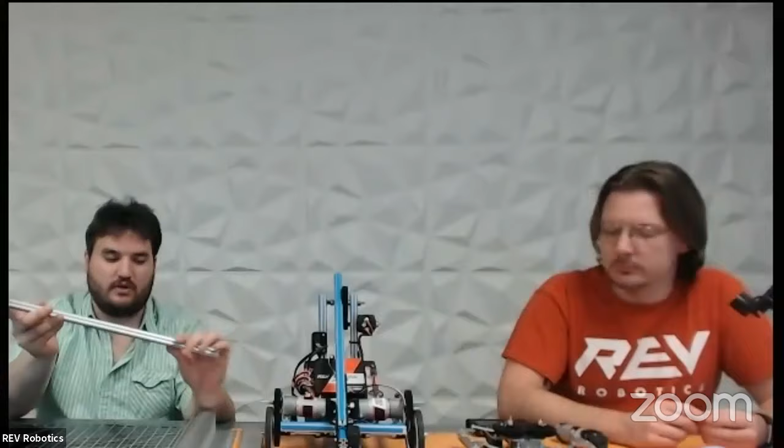Being able to prototype something in a computer lets you make all of the mistakes for free, right? Not only do you have the ability to see how long a piece of material should be without having to cut it, but you also have a superpower, and that's the Control Z button, right? You can undo any mistake and you can redo something different. You can try all of these things in a virtual environment really quite easily.

And it lets you figure out the problems before you spend a bunch of time, because modeling up something in CAD, I know at the beginning it seems like it's easier to do it physically. But as you get better, as you practice with CAD, you will find that you can mock something up much faster in a CAD program than you can in real life. So you can try all of these ideas much more quickly.

And one of the other things is, if you don't have access to a 3D design software, it doesn't necessarily mean that you shouldn't be thinking about your design ahead of time. One of the big things that Frank is mentioning is scale. Scale is really, really important for you to get a handle on. In the computer, it makes some of these things faster and easier.

But if you're using grid paper and you have a scale where each piece of the grid is equal to 1 millimeter or 5 millimeters or a centimeter or some unit of measure, you're able to then take that and apply it to the real world. So you can sit down and say, you have a ball, which is going to be 40 millimeters in diameter, and you can draw out with a compass what that is. And you can see what the minimums are going to need to be before you even get started.

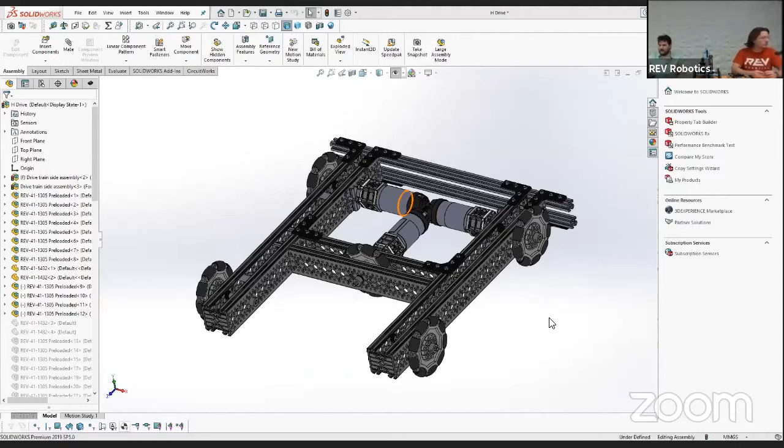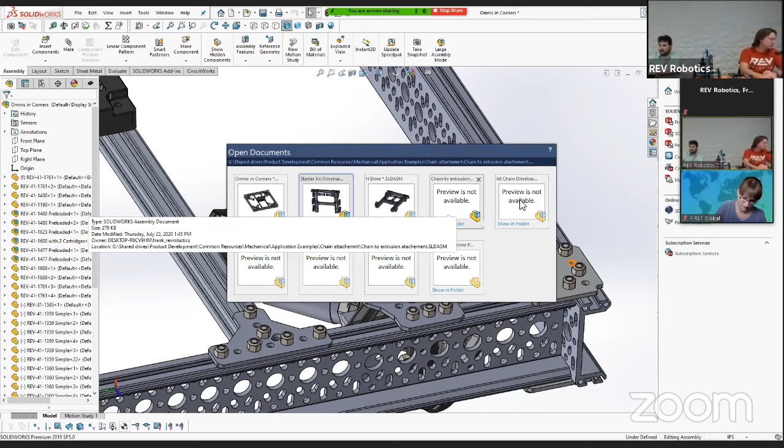I actually wanted to share some examples of things that we've got mocked up in CAD. Here's a drivetrain example. Here's another drivetrain example. These are all different things that you can relatively quickly do in a CAD program and figure out exactly which brackets you need, figure out where all the nuts and the screws need to go to make all of these things possible. It is a tool to help you come to your design faster.

And when you get there, it's going to be more thought out, it's going to be stronger, it's going to be more reliable. So again, to answer that question, yes, it makes a huge difference. It makes all the difference in the world.

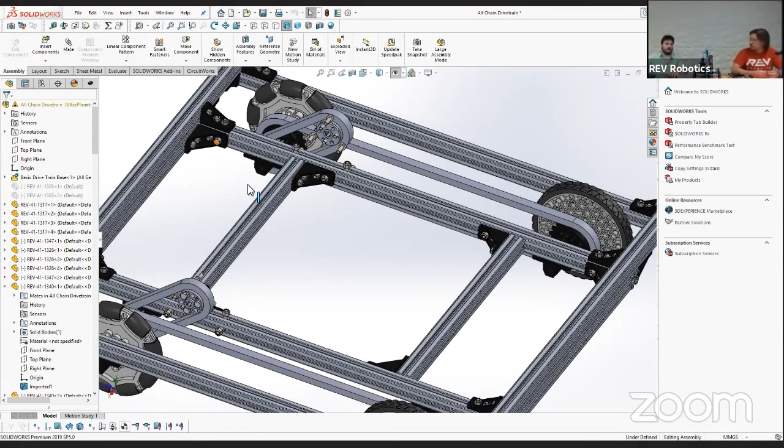And I believe we're going to be doing another live stream in the coming weeks, specifically on CAD design using SolidWorks XDesign. Yep. We'll go over some topics like Crayola CAD and doing assemblies using XDesign. So that'll be really cool. Yeah, and that will give a little bit of an intro, some training from us here to walk through that tool. Every First Global team has access to XDesign. So thanks to SolidWorks for giving these licenses.

And the really great thing about XDesign itself is it is not limited by the computer you're using. A lot of CAD software packages may be limited by the power and the capability of the individual machine that they're running on, where this is actually operated out of a web browser. So you need an internet connection, that is one of the limitations. But if you have access to the internet, you're able to model and share your designs with the other members of your team.

And the other really great thing is this is a team-based project. A lot of projects that you're going to be working on as you move forward in your lives and hopefully go into careers in science and technology, you will be working in teams, and having the ability of showing somebody something you've designed in a virtual environment or a drawing allows you to get feedback from them, and they can ask questions and potentially point out things that might be issues. You're not going to get everything right the first time, right?

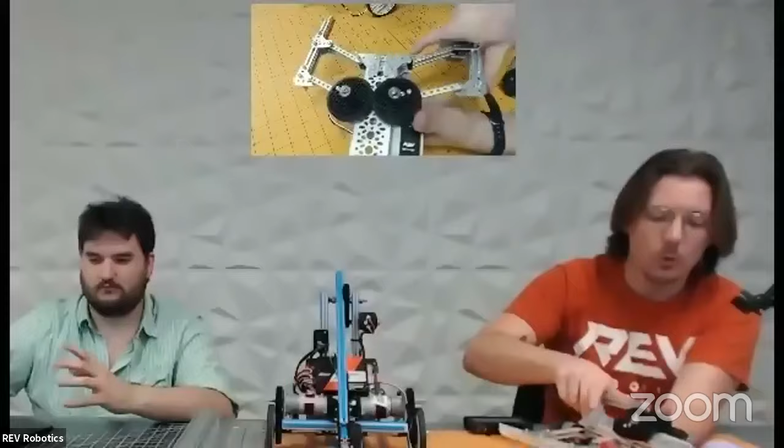If you go on Wikipedia or just search on Google 4-bar linkage, you can see examples of how it's used in tons and tons of ubiquitous things that you just don't think about. Yeah, and one of the big things with a 4-bar linkage is that these two faces, in this case the line of the structure that it's mounted to and the end of the claw, will always stay parallel to each other no matter where it is in travel, which is really important

for certain applications, right? Like if you had a basket that you wanted to move up, you can move it up and out, or up and back in. For this example, there's the plastic claw that is in the First Global kit. One of the troublesome things with that is, depending on the type of object that you're going to grab, it just has this type of a motion. So then it slips out from the end of it, when instead you want to come around your object and grab it from the sides. So it depends on the type of object.

There are some clever things that you can do just with the materials that are in your kit, and you can even supplement these. Now this might not be game legal for any individual First Global game, but you can utilize REV materials with other materials that are near your home to fashion things that are similar. So that's kind of a cool idea.

So a question that I've seen pop up is about gears and how you pick the right types of gears. And we actually have a bunch of documentation on this, as well as on a whole bunch of other things that I would like to point out. If you go to the REV website and you select technical resources, we have a complete documentation guide. Let me go ahead and show that to you guys.

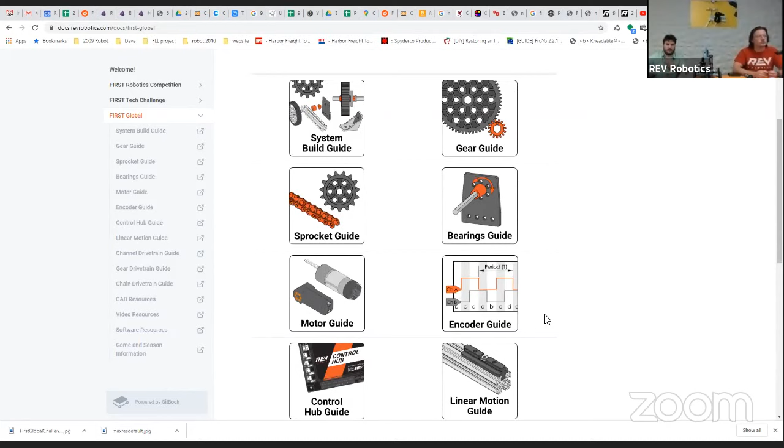And in here, we have all sorts of documentation where you can learn more about individual topics and how they relate to designing your robot with REV stuff. If you want to learn more about gears, you can select the gear guide, and we show you all the important things to keep in mind when you're designing with gears and understanding speed versus torque, all those kinds of things. Same thing with chain or with different drivetrain designs. So wanted to go ahead and point that out for you guys.

Yeah, and so one of the things that's really great about the new website, the new system, is it's all online, and you're able to export it as a PDF to save it on a local machine. So that's one large scale benefit. The secondary thing is right now, all of it is in English. We're actually working on getting it to a point where we're able to start doing our translations.

We would like to be able to get it into a lot of the languages that have been supported by First Global in the past, for example, Spanish and French, I know are two of the major ones that we do want to get done to make it easier for teams across the world to learn about this in their own native language, to be able to have that type of an impact.

The one really great thing that we also try to do with those guides is there is enough information for the practical, right? To get you enough info to get up and running and how this thing works. But then if you wanted to start doing a deep dive and figure out what does modulus mean for gears, or what some of these bigger terms are, what are these actual elements, we're continuing to add information that is more educational as well.

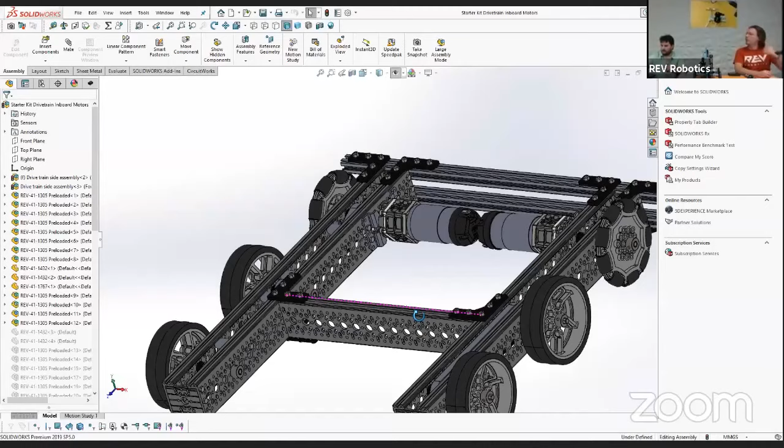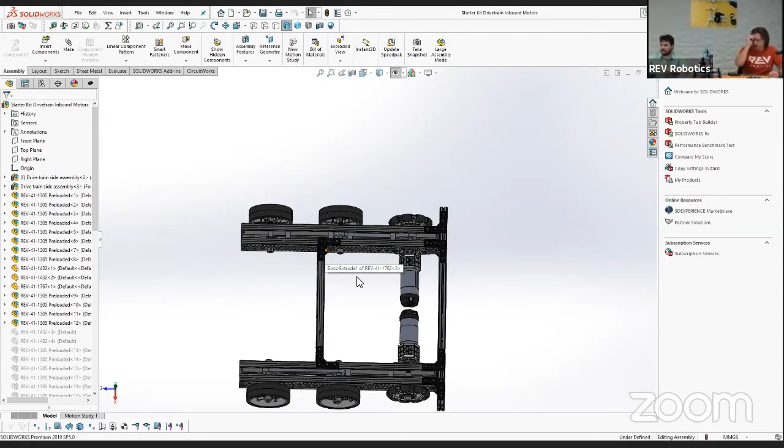So this is a basic drivetrain that is being included in the FTC starter kit. In this example, we are using chain as well as direct driving a wheel using the UltraPlanetary, which is a motor that we just came out with. We chose to do chain because chain lets you have more design flexibility when you're trying to go a long distance. If we had to do gears, we'd have a whole bunch of gears along the way. And the fewer axles you have, the more reliable your entire system is going to be.

The thing I will tell you with chain is you need to make sure it's properly tensioned. A loose chain is going to skip teeth. The more a chain skips teeth, the more damage it does to the sprocket, and then the more it'll skip teeth again in the future. So make sure that you are properly tensioned. And again, I'll point you towards the technical resources we have published on the REV website. We have a guide on chains and sprockets that can show you some other tricks to making sure your chains are more reliable.

And one rule of thumb that I like to personally go by is if it's going to be something that is close in and compact, it might be worthwhile thinking about using a gear to do that type of work. Or if you wanted to do a gear reduction or an upduction. I personally wouldn't recommend doing upduction, but sometimes you have to. If you were to do a gear reduction from your motor, that's another good time to use gears. As Frank mentioned, sprockets and chain are a really great way of going longer distances.

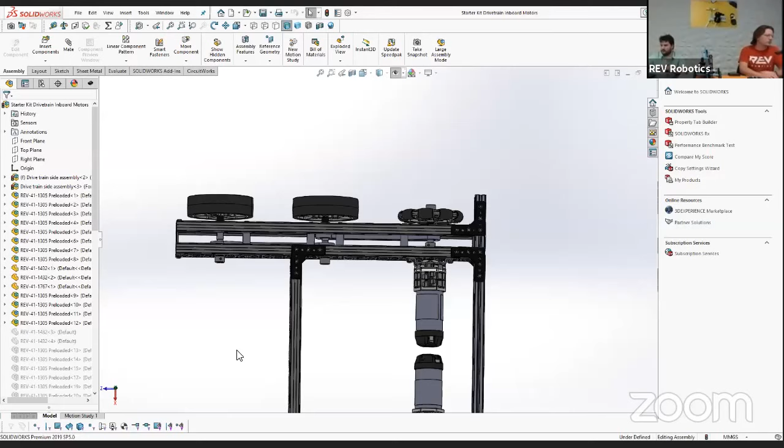A question that I saw from Team India that I wanted to answer was, how do you make a smooth, fast, lightweight, sturdy linear motion mechanism? There are a lot of ways to build linear motion mechanisms. I would highly recommend you guys talk to each other on the Facebook group and ask for pictures from other teams. I remember from last year, Team Hong Kong had a very cool linear motion mechanism that you should check out. But here's an example of a way to get a really smooth linear motion system going. So let me see.

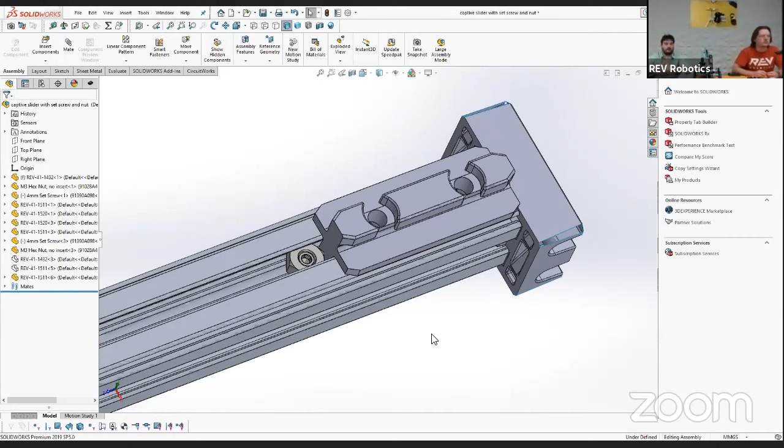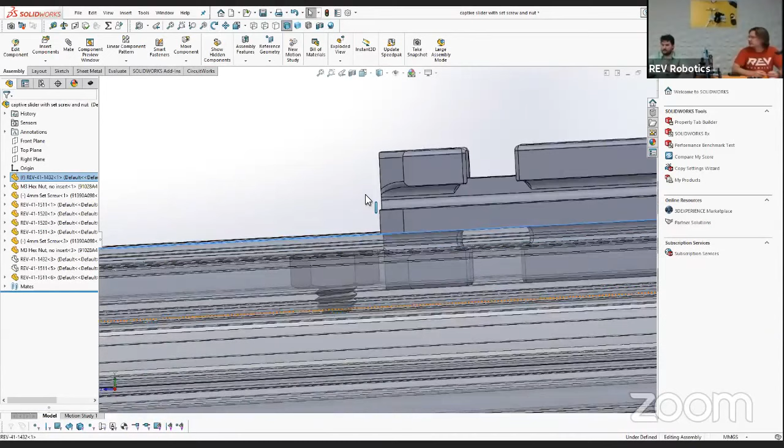One of the problems you can run into with the REV linear motion system, especially when you start to get really long, is the slides get really tight on each other. To make them nice and loose and smooth, instead of screwing down the slider using the bolt that goes through this hole, you can take a set screw and a nut, put that behind the slider, and then use an end cap to cover the top of the extrusion. This will let your slider float and wiggle around a little bit in the channel, and that will help give you smoother, faster motion when you're doing a long slide.

I will note that this will make your linear motion system a bit weaker, but if you want speed and you want it light, this is a way to achieve that. Yeah, and there are a number of ways to build that linear motion system. One of the other tips is, when you're adding on the side sliders, there is a little bit of a tuning process, right? Yeah. One of the big things, kind of a mantra for lack of a better word around here, is snug, not tight.

A lot of times you get really excited, or you're trying to get ready for your next match, and you just start cranking down on something, and if it gets too tight, the whole system gets over constrained and there's a lot more friction built up, which makes it harder for those linear systems to move. So that's one thing there. But I'll mention it again.

If Team Hong Kong is on here, or if you guys can find pictures, the way they did their linear motion last year was very cool. Yeah, so there's a number of really, really great ways of being able to do that. Let's see, we're kind of scrolling through some of our questions here to see if we can find some other ones that I know we wanted to ask or answer.

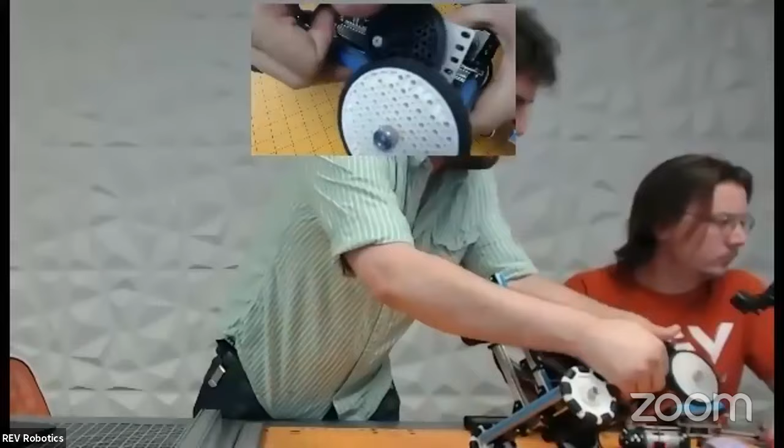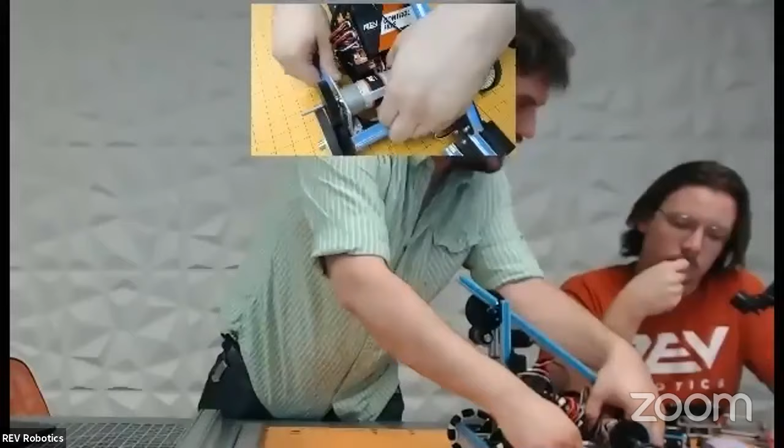So there are some in the chat over here. Team Qatar just asked about loose gear meshing. Just like we were talking about, you want to make sure that you don't have any bending loads. We can sort of see it right here. Let's see. If I push down on this motor, pull up and down, you can see how that meshing changes for those gears. So you want to minimize any potential weird forces happening on that motor.

Another trick that I like to do is when I'm trying to get the mesh, I leave these two screws just a little bit loose, and then I push the gears together. And while I'm pushing them together, I then tighten the screws to make sure I've got a good engagement. Yeah, and so there's some things that you're able to do along those lines to make sure that your gears stay meshed, making sure that everything is kind of snugged up there.

Another thing, like with the motors as well, is that they can be a little heavy. So doubling up on your brackets is never a bad idea. Having it where you use some of these side mounting to be able to connect into another piece of extrusion, right? You don't need to just connect on one face. You can connect in some other ways. Building robots that are rigid, especially around power transfer, is really, really important.

Absolutely, and a rule of thumb that we like to recommend is, whenever possible, use 2 brackets to hold any 2 pieces of material together. Find a way to attach it in 2 brackets. That'll make it a lot stronger, a lot more robust.

Yeah, so whether that's on pieces of extrusion that you're connecting together and you use an inside corner bracket with a 90-degree bracket, or you're mounting a motor, or any of those types of situations, if you're able to put 2 on there, or you're able to directly connect one piece of extrusion to another piece of extrusion, that can also help to give a little bit more support and more rigidity to any type of setup.

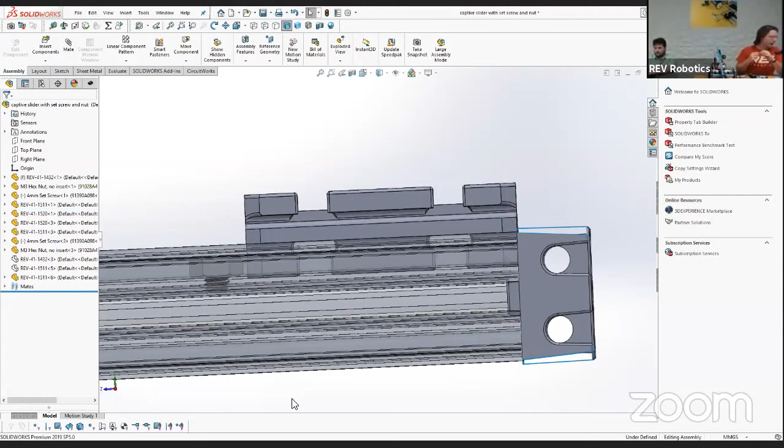And with that, I think there are a few more questions in here. Do we still have that pulley thing? This is the one thing that I think we didn't actually hit on. One of the questions that we actually get often is when do you use round belt with the pulleys, and should you use that instead of sprockets and chains or instead of gears? One of the things that round belt and pulley is really good for is picking up game mechanisms.

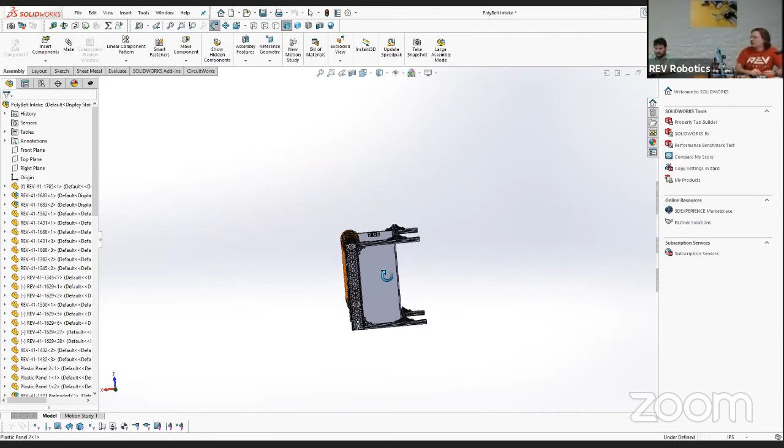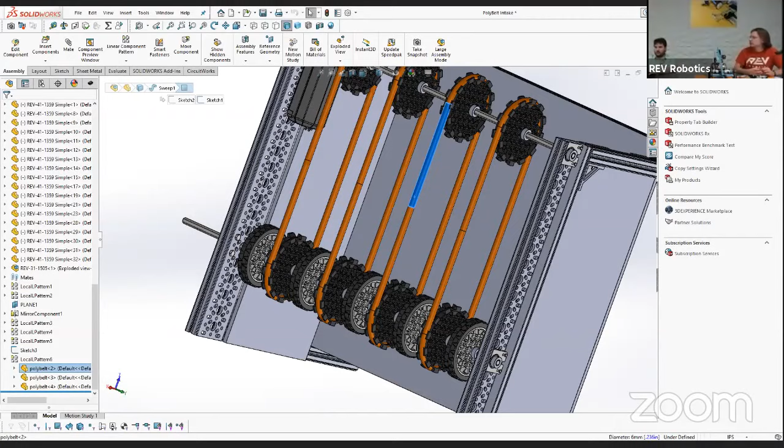So this is an example of a conveyor intake mechanism. This would be mounted in this orientation on your robot, and a ball would get sucked up and in and carried up through here. And this is using the polycord. One of the questions that I saw with the polycord is how you join the end pieces together. In your polycord package you should have received, one second, let me pull up the REV website and show you guys the specific.

Yep, having some warm water, and then also getting something to be able to hold on to the barb, whether it's pliers or something else. Pliers, vise, all that helps. The warm water is actually an A+ tip. It warms things up just a little bit, allowing it to expand, and then you can just jam the plug in there. That was one of the things we had questions about, how do you use those things. Frank and I were actually talking about this earlier today, and we almost forgot about it. So that's bad on us.